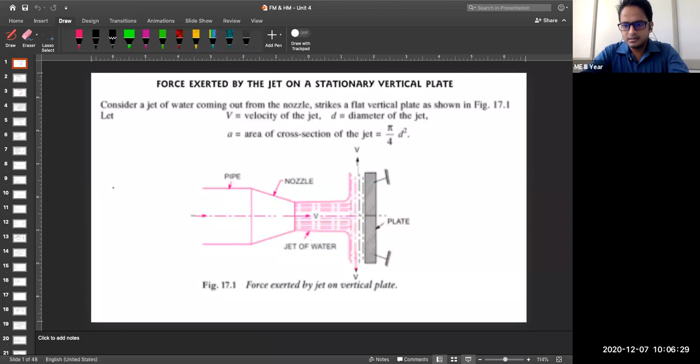On the screen you can see one figure is there. Let me make it large. On the screen you can see one pipeline is there. This is your pipeline. A nozzle is connected to this pipeline. Now I hope it is clear to all of you what is the meaning of nozzle.

Here you can see the cross-sectional area of your pipe is reducing. If the cross-sectional area of the pipe is reducing, the velocity will increase. Keep this in mind, again and again I am repeating it. So what is the velocity over here? It will be slightly higher than the velocity over this cross-section. This is the function of this nozzle, we want to increase the velocity of the fluid flow. So now you can see here the fluid is flowing.

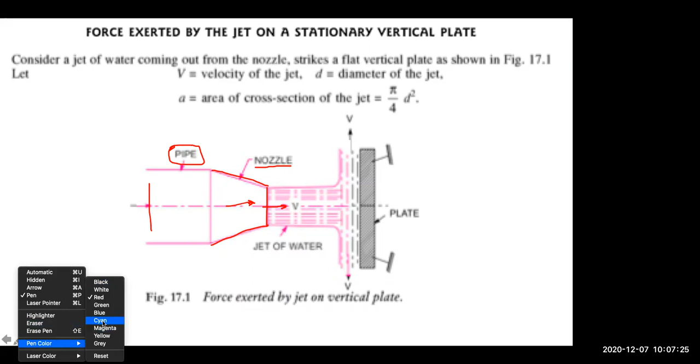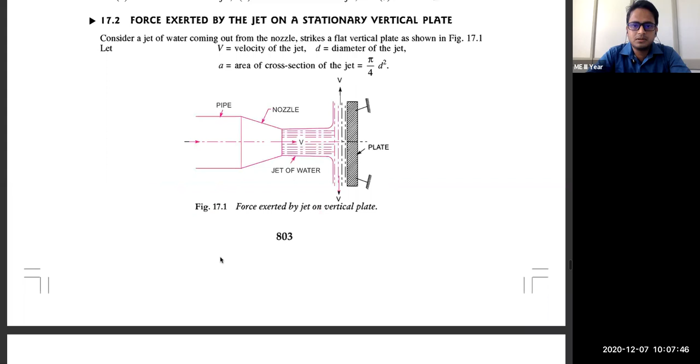Sir, the slide is not clear, sir. Slide is not clear. Okay, yeah, for me also it seems to be a little bit blurred. Don't worry, I will share then. Some other, where is that? Okay, now this is visible. I hope this is okay. Yes sir, visible, clear. Okay, okay.

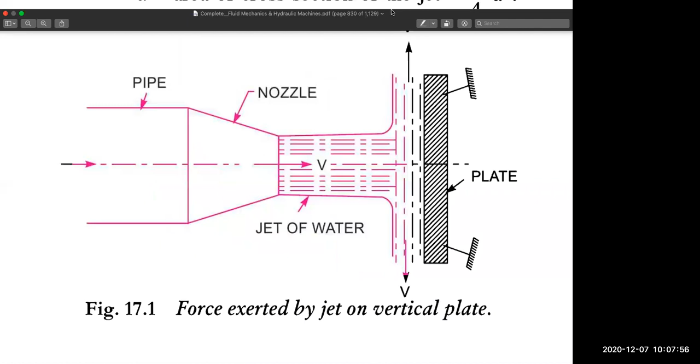Now let me bring in those annotations here. You can see here one pipeline is there, nozzle. So we are increasing the velocity of the fluid flow through this reduced cross section.

And you can see here on the right-hand side, one plate is connected. And this symbol, if you focus on it, represents that this plate is held stationary. This plate is fixed, it is not moving. This symbol you keep in mind. Why am I telling this? Because first we are studying the case where the plate will be in a stationary position. Next case we will study when this plate will also be moving.

Now what is happening here? The fluid is coming. Let me see whether I can change the color. Yeah, I can change the color also. Yeah, you can see here.

Blue color I am using. Okay, the fluid is flowing in this direction, and it is giving an impact on this vertical plate. Afterwards, the fluid is moving in perpendicular directions on both sides, upward and downward. You can see the fluid is moving.

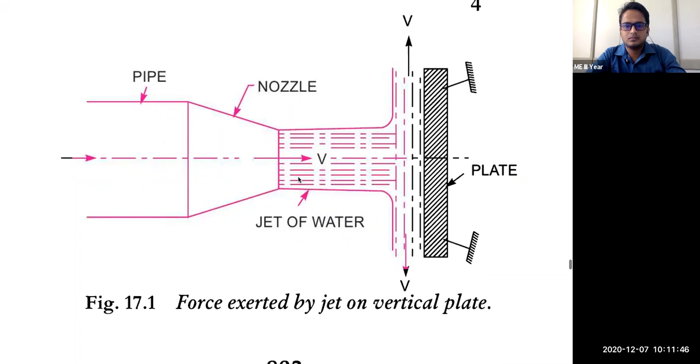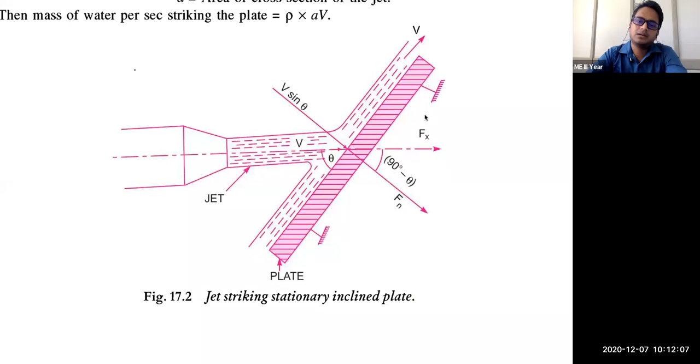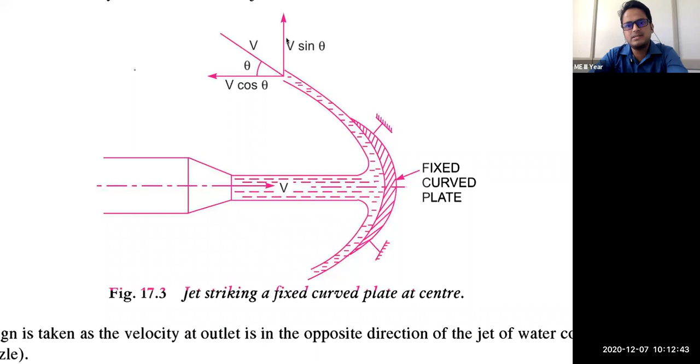After this, the third case that we will see is this one, where the plate is curved and fixed. The plate is fixed and curved in nature, now it is not straight. So what will happen when the fluid is hitting here at the center, and the fluid is exiting tangentially with this curved plate? Now you can see the exit velocity is making some angle theta, so we will break the components into sine theta and cos theta. We will see one by one.

So I have shown you all the three cases that we are going to study. Now we will see the mathematical part.

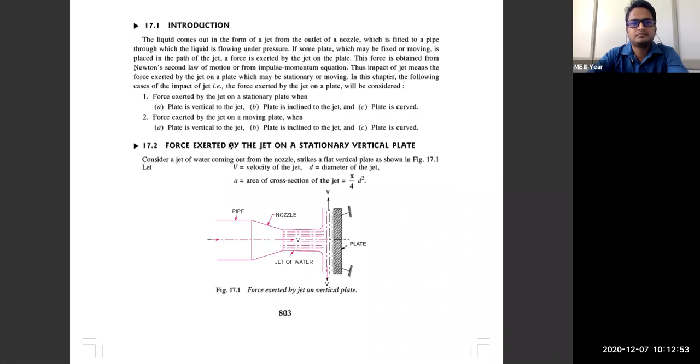As we have studied or discussed earlier also, we will be using Newton's second law of motion for its mathematical derivation. Now let's see what is the introduction written over here.

When the liquid comes out in the form of a jet from the outlet of a nozzle, which is fitted to the pipe through which the liquid is flowing under pressure, as I have told you, the liquid is flowing under pressure at this location. If some plate, which is fixed or moving, let me change the thickness of this, is placed in the path of the jet, the force exerted by the jet on the plate, we have to calculate.

And how will we calculate it? This force is obtained from Newton's second law of motion. Keep this in mind. Or, as we have discussed earlier also, the impulse momentum equation. Thus, the impact of jet means the force exerted by the jet on the plate, which may be stationary or moving.

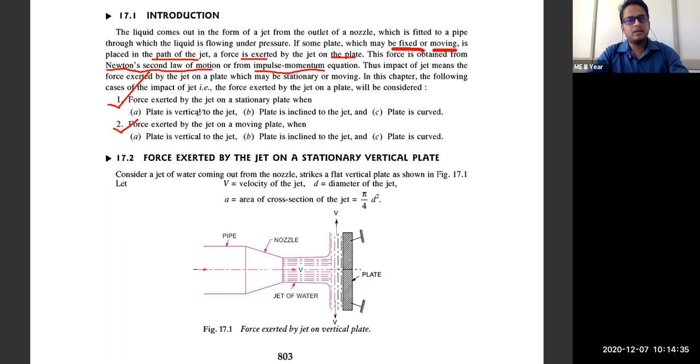So we will see two cases. The first case here is where the plate is stationary, the second case where the plate is moving. Plate is vertical, plate is inclined, plate is curved, for the second case the plate will be moving. Those three cases only, but this time it is not stationary, it will be moving.

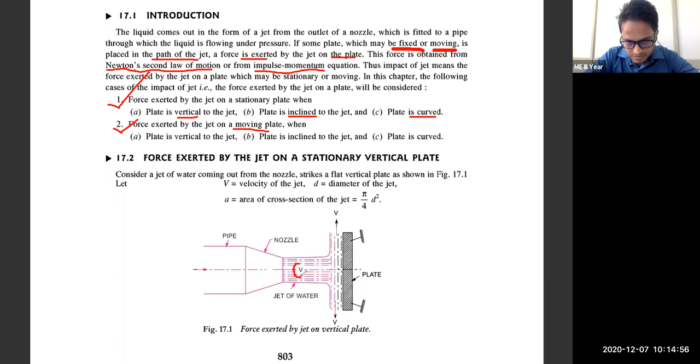Now let's see the derivation part. The velocity of jet is represented by capital V. The diameter of jet, it will be represented by this location. This is your diameter of the jet, represented by capital D, the small d, diameter of the jet. A will be the cross-sectional area of the jet. We all know the formula for the cross-sectional area will be pi by 4 into d square.

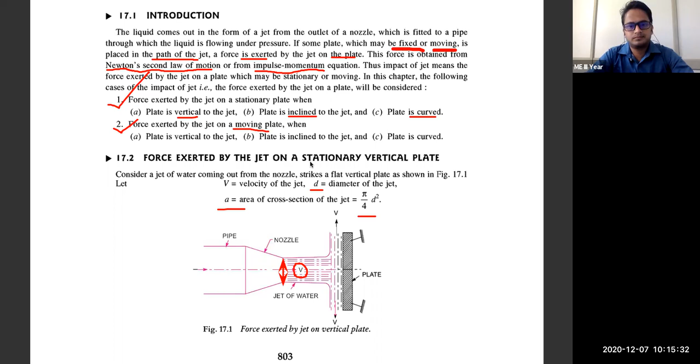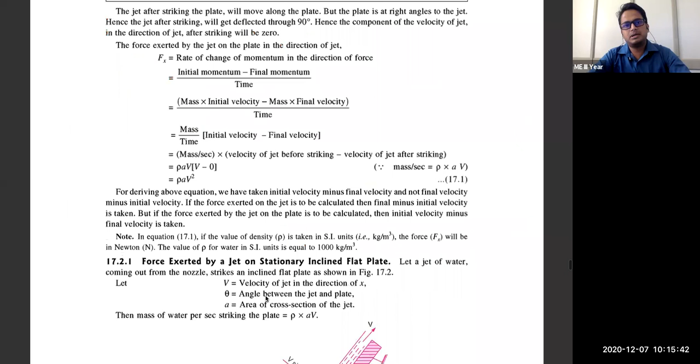Now, if you remember the impulse momentum equation that we have studied, when the jet strikes the plate, the jet after striking will move along the plate, but the plate is at right angle to the jet. Hence, the jet will be deflected to 90 degrees, as I have told you earlier.

Here I have told you two assumptions we are taking. First, there is no frictional loss, and second, there is no loss of energy due to the impact of the fluid on the plate.

Now as per Newton's second law, or the impulse momentum equation, we know that force exerted in the direction of the jet equals the rate of change of momentum in the direction of force. Rate of change of momentum means initial momentum minus final momentum. Momentum is nothing but the product of mass into velocity.

If I am telling initial momentum, mass flow rate will remain the same. What is changing? Velocity. So we can say mass into initial velocity minus mass into final velocity, upon time. Since mass flow rate remains the same, we can take mass upon time outside of the bracket. What will remain inside is the initial velocity minus final velocity.

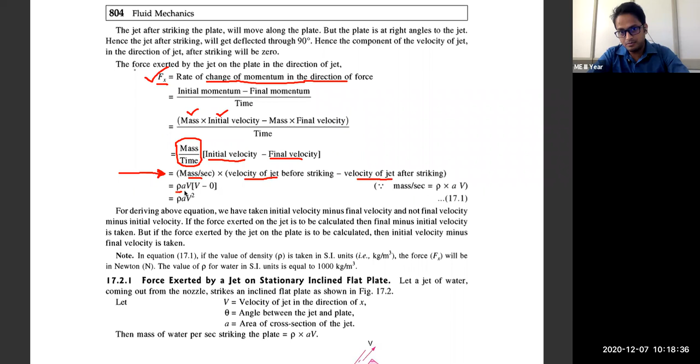What is the mathematical expression for mass flow rate? Keep this in your mind: rho into A into V, where rho is the density of the fluid, A is the cross-sectional area, and capital V is the velocity of the fluid.

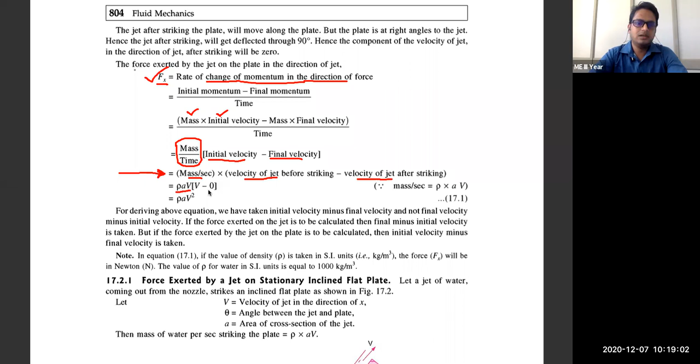We all know that the velocity of the jet before striking is given by capital V. Now for final velocity, here I am writing 0. Can anyone tell me why I have written 0 here? When the water strikes the blades, then the velocity becomes 0, sir.

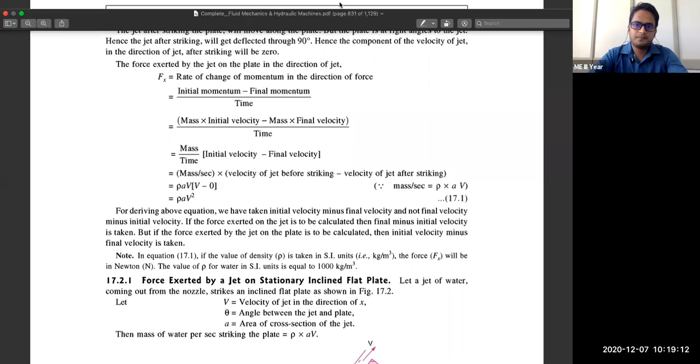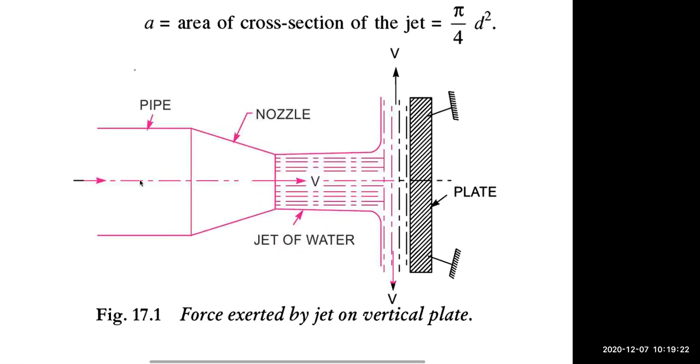Not a complete answer. The answer is correct, but it is not complete. See the figure, then you will get some idea. Here I am telling you that we are calculating the force in the direction of fluid flow. And what is the direction of fluid flow? Horizontal direction.

Here at this location, the velocity is V. Now final velocity, I told, is at the exit location here, and you can see the velocity is V here also. But the thing is, it is in the vertical direction. And we are calculating the force in the direction of fluid flow, which is this direction. So what is the component of velocity in the x direction? It is 0. We have only the y component of velocity here. That's why we have taken final velocity as 0.

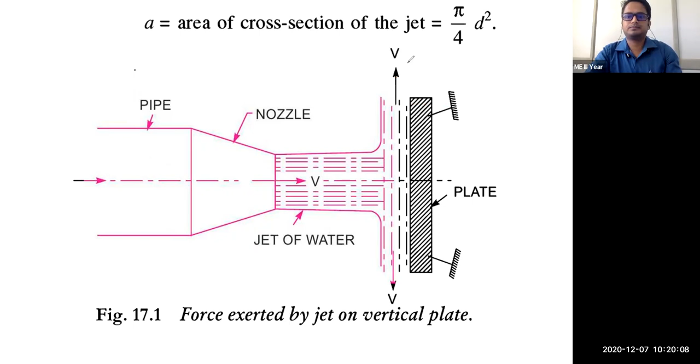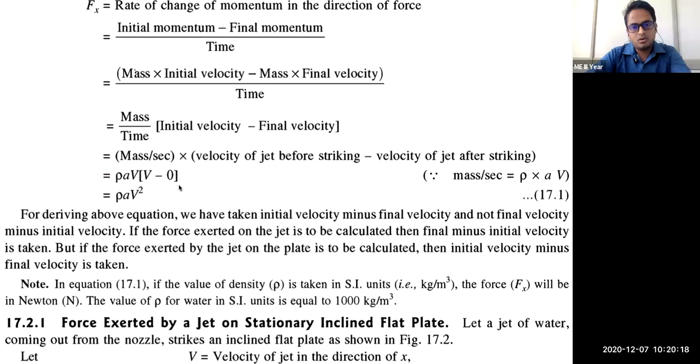I hope it is clear to all of you. Now, if you multiply this, it is a simple expression that you are getting: rho into A into V square. So this is the expression you have to use for solving the numericals.

When the plate is stationary and some fluid is hitting it with velocity v, the nozzle cross-sectional area is small a and the density of that fluid is given by rho. So this is the derivation part of the force exerted by the fluid on a flat vertical stationary plate.

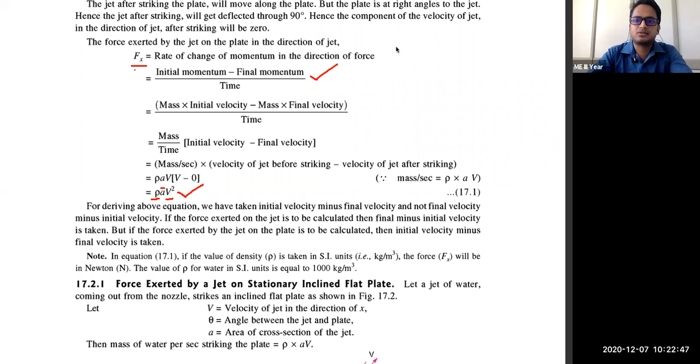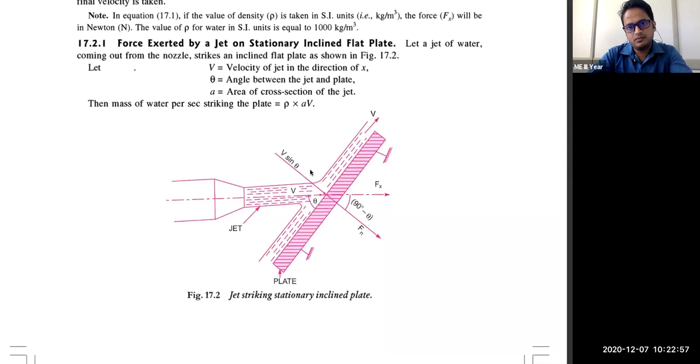Now what I have done here, we are going to study the force exerted by the jet on a stationary inclined flat plate. Here you can see the plate is making some angle theta with the direction of fluid flow. In this situation, what will we do?

So we are going to calculate here the force perpendicular to your plate, since the plate orientation is like this. How much force this fluid will exert on the plate in the normal direction, and then after that we can break it into components, that is your x component or y component, in whichever direction you are looking for.

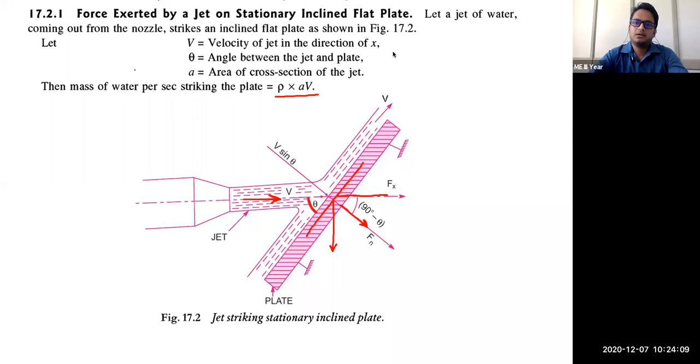Let's see. We all know that the mass flow rate of the water striking is rho into a into v. Velocity of the fluid is given by capital V. The angle between the jet and the plate is theta. Now we will see its mathematical part.

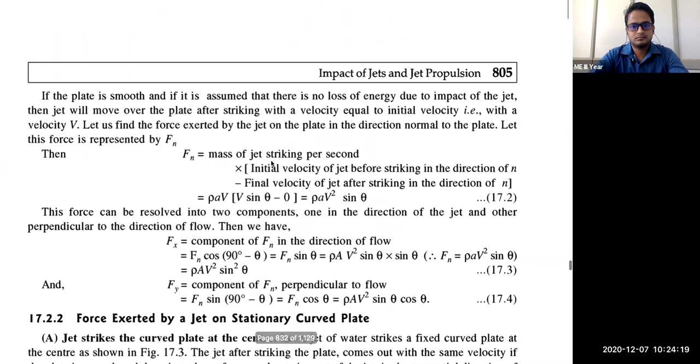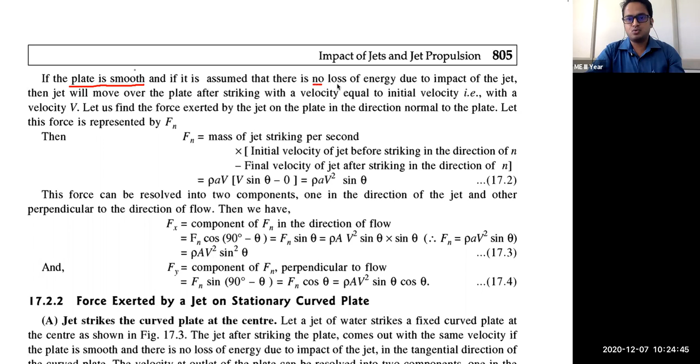Now see here, those two points are highlighted. What are those two points? The first point: the plate is smooth, meaning there is no friction at all. The second assumption is that there is no loss of energy due to the impact of the jet.

So the two assumptions: first, the plate is smooth; second, loss of energy due to impact of the jet is negligible, or no loss is occurring. Then the jet will move over the plate after striking with velocity equal to the initial velocity. Only if these two assumptions hold will the final velocity and initial velocity remain the same in magnitude. Only the direction changes, you have to keep that in mind.

So let's see how to find the force exerted by the jet on the plate in the direction normal to the plate, Fn. The formula remains the same. Here we use the Fn term because we are calculating the normal force, meaning perpendicular to the direction of the plate.

Now, mass of jet striking per second is nothing but the mass flow rate, given by rho into a into v. And we need the initial velocity before the jet strikes the plate, and the final velocity after the jet strikes the plate. So again I will show you that figure, and we will find out how to calculate the velocity before striking and the velocity after striking.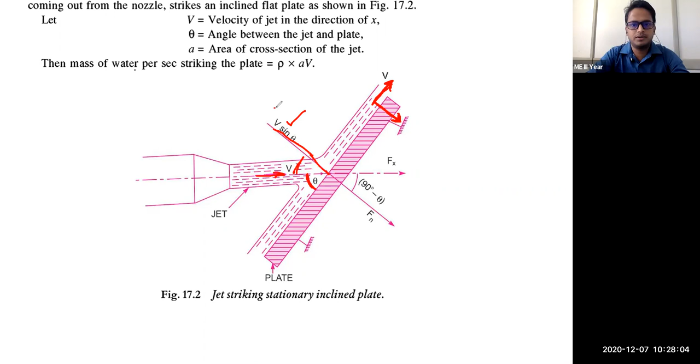And we are eager to calculate the force in normal direction, so in this direction there is no velocity component. That's why the final velocity term will be 0 and the initial velocity term will be your V sine theta. Rest all remains the same. Okay, so let's see here.

This is how they have written that Fn equals rho into A into V. This is your mass flow rate. Initial velocity V sine theta, how it comes I have shown you through the diagram. Final velocity 0. The thing you have to keep in mind is the direction.

We are calculating both in the direction of n. So if you simplify it, what you will get is rho A V square into sine theta. This is your expression for the force in normal direction.

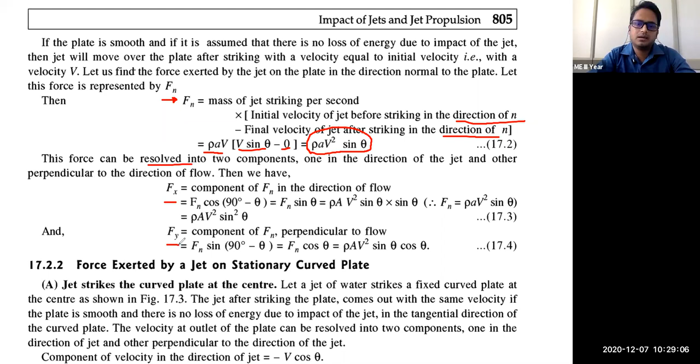Now you can break this component into vertical and horizontal direction, so it is resolved into two components: first is your Fx, second is your Fy. One direction is along the jet and another perpendicular to the direction of flow. Since it is at some angle, there will be two components.

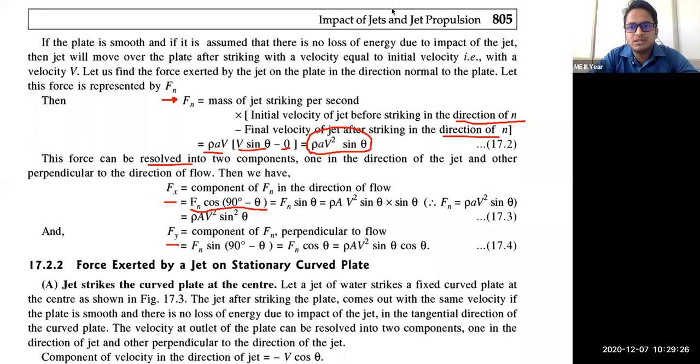Now see here how Fx equals Fn cos(90 minus theta). You have to see that diagram, I will take you to it. You have this Fn in this direction, and in this direction you have Fx.

So you have to see what angle it is making. 90 minus theta is this one, so your Fx will be Fn cos(90 minus theta). Similarly, if you want to calculate this one, it will be Fn sin(90 minus theta). So this is how that component has been broken.

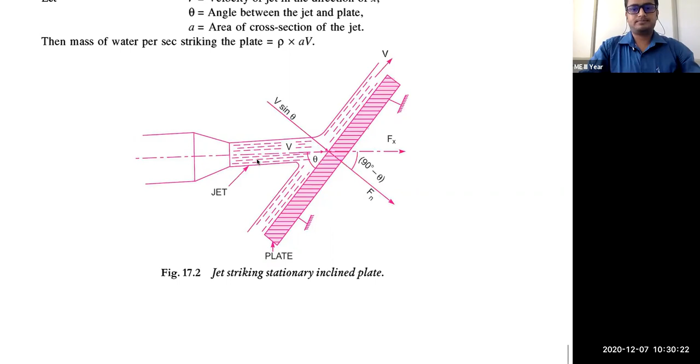That is good, so this is how we calculate the components: Fn cos(90 minus theta). Later, for cos(90 minus theta) you can write sin theta, and for sin(90 minus theta) you can write cos theta. So what expression will you get?

Fn that you have obtained over here is rho A V square sin theta; into this sin theta will come, so it becomes rho A V square sin square theta. This is the force component in x direction. Similarly, you can calculate the force component in y direction. Sin(90 minus theta) becomes cos theta, and the final expression you get is rho A V square sin theta into cos theta.

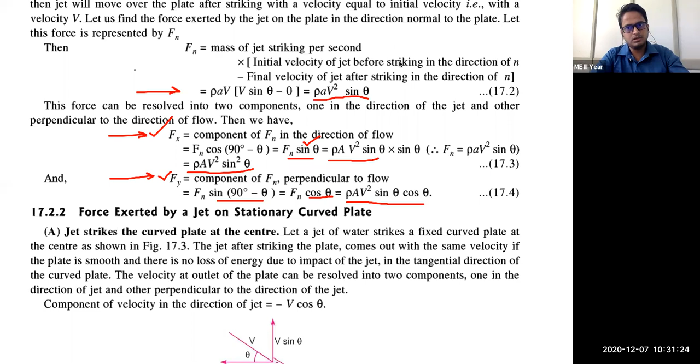So these are the expressions we have obtained for Fn, Fx, and Fy. Now the third case I told you about, when the plate is in a curved position, when the plate is curved in nature.

Here you can see the plate is fixed. How do you show the plate is fixed? This diagram, this notation you have to use. I am highlighting and circling this because in examination many students forget to draw it. So do not forget this. If you have to represent that the plate is stationary, you have to draw this symbol. If you don't draw this, the examiner will think the plate is moving with some velocity.

Let the water jet strike the fixed curved plate at the center. Here we are hitting this curved plate at its center, and you can see it is symmetrical in nature about this center line, symmetrical on both sides.

Those two assumptions will stay here also. What are those two assumptions? The plate is smooth, and there is no loss of energy due to impact of the jet. Always keep these two assumptions in mind.

When the jet is hitting and there is no friction, then it will move in the tangential direction to your plate. And what is that tangential direction? This is your tangential direction. Since there is no loss of energy, the velocity will remain the same in the tangential direction, given by V. And it is making some angle theta with your horizontal direction.

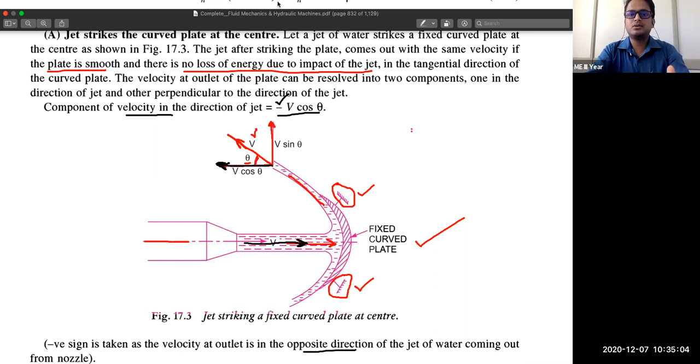Now we will see the mathematical part. For your clarity, I would like to tell here once again how we are calculating that mathematical expression. The same formula you have to use here also: mass flow rate into initial velocity minus final velocity. Only thing that you have to take care is the direction of the fluid flow. Okay, so let's see.

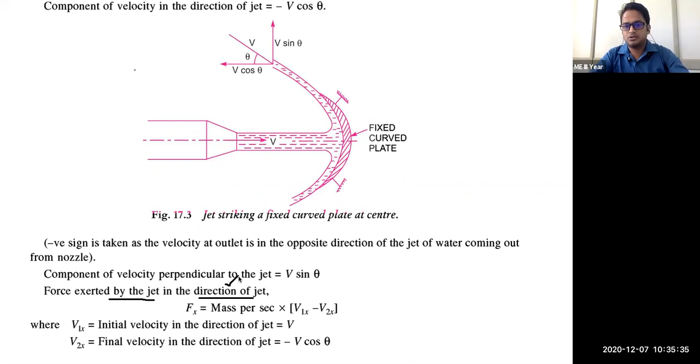First, we will calculate in your X direction. Force exerted by the jet in the direction of the jet. In the numerical, it will not be written as X direction or Y direction - they will write in the direction of jet, perpendicular to the direction of jet. So if it is written in the direction of jet, you have to take care. For this particular case, it will be Fx.

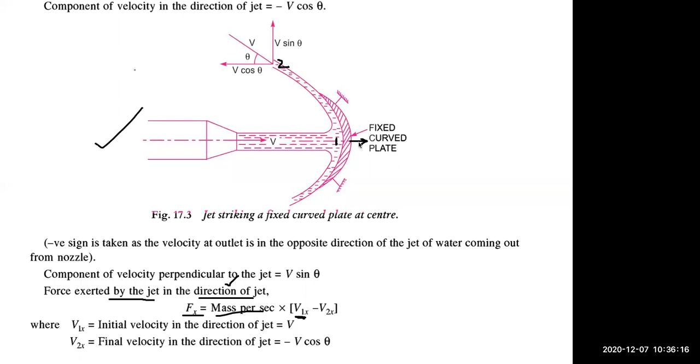Mass per second, it is mass flow rate into V1x. What is V1x here? At this location, I am taking it as 1. At this location, I am taking it as 2. Location number 1, before striking the plate. Location number 2, after striking the plate. Suffix x is coming because we are taking the X direction here for this case. So V1x means velocity at point 1 in the direction of X, and V2x means velocity at point 2 in the direction of X.

So we know that at point 1 it is V, at point 2 it is minus V cos theta. So you can substitute this value. You know the expression for mass flow rate - it will be rho into A into V into V1x minus V2x. Let's see afterwards what is happening.

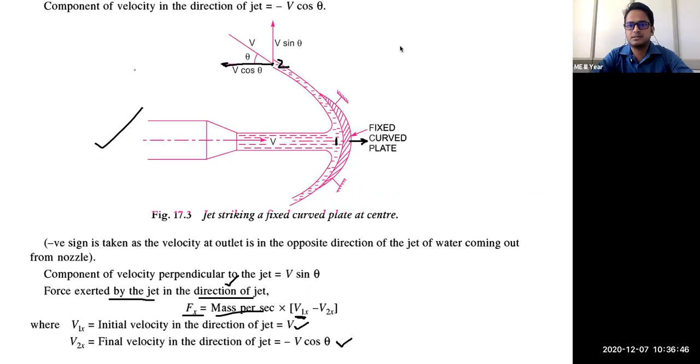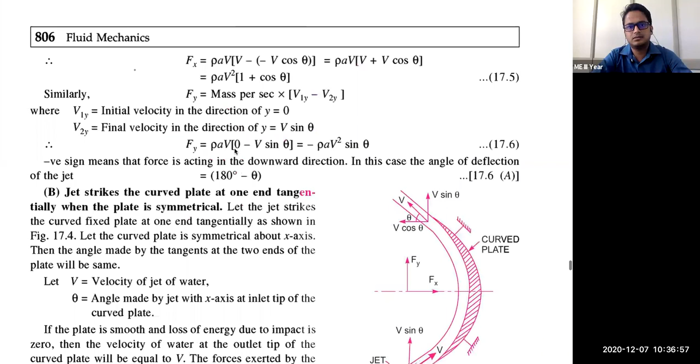So here you can see rho A V, V minus of minus V cos theta. So minus and minus, it will become plus. So what you are getting here is rho A V square into 1 plus cos theta. So what is the final expression? This is your final expression for force in X direction. It is nothing but rho A V square into 1 plus cos theta. So you have to keep this in your mind: rho A V square, 1 plus cos theta.

Similarly, in Y direction, now we will calculate Fy. The formula will remain the same: mass flow rate into V1y minus V2y. Now try to think, try to assimilate what is this V1y. V1 means velocity at point 1 in Y direction. This term - velocity at point 2 in Y direction.

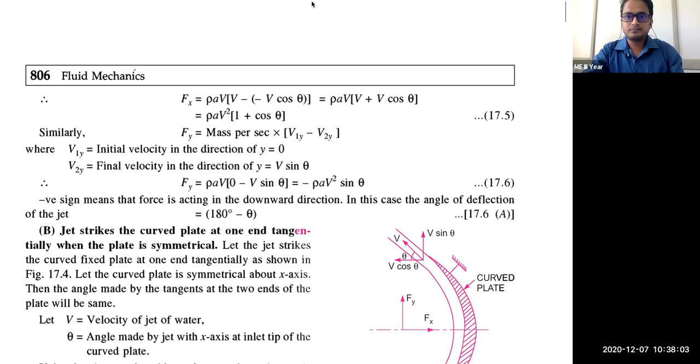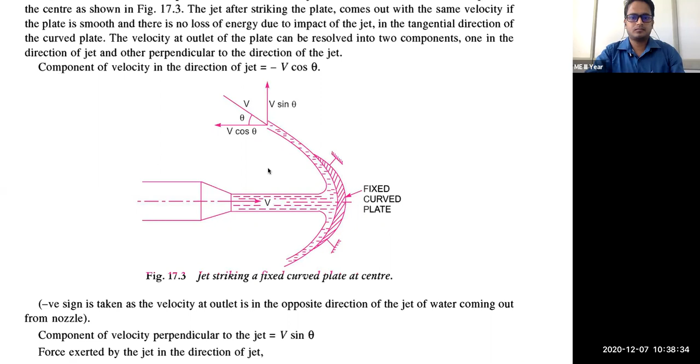Okay, so once again I will take you to that diagram. Now this diagram, if you will see, what is the component of velocity in X direction, Y direction here? In Y direction, the velocity component here is 0. And at location number 2, the velocity Y component is V sine theta. So this you have to use in your numerical expression. So initial velocity we are taking 0, final velocity we are taking V sine theta.

Why here we have not taken a minus sign? Because this V sine theta is in the vertically upward direction. So what expression will you get here? You will get minus rho A V square sine theta. Here the negative sign represents that the force is acting in the downward direction.

And the angle of deflection of the jet - this you have to keep in mind, because in numericals we will be using this term, the angle of deflection of the jet. In numerical problems, this data will be given. So this is 180 minus theta degree. How is it coming like that? Suppose this is that same figure you can see here - if you are extending this on the back side, I am extending this.

It is intersecting at this location to the horizontal axis. You can see here on the downward side, this angle is your theta. So what will be this angle? This will be your 180 degrees minus theta. So this angle is normally called the angle of deflection, because the fluid is coming in this direction and getting deflected in this direction.

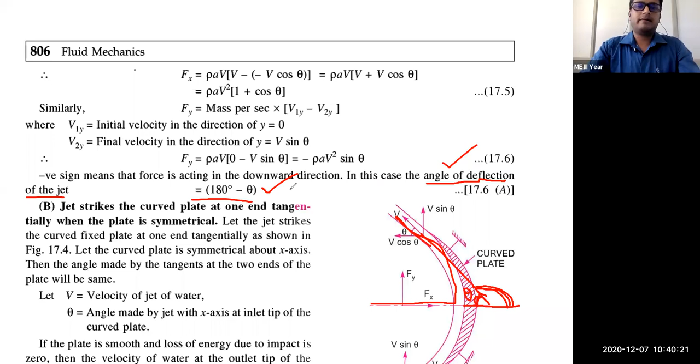So we have seen 3 cases. The first one is when the plate is stationary vertical. Second case, when the plate is stationary but inclined at some angle. And the third case, when the plate is curved and stationary. These 3 cases we have seen, and its mathematical derivation we have seen. Now one numerical from all 3 cases we will solve.

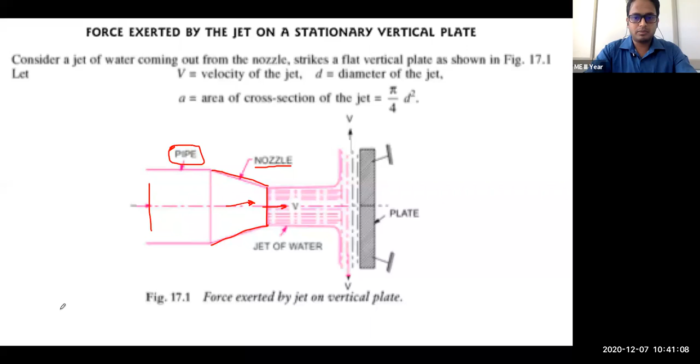I'll go back to my PowerPoint slide and we will solve numerical. I'm expecting all of you to be ready with your calculator now. Now we will solve numerical and do fast calculation, because we have only 10 minutes, and in 10 minutes we have to solve 3 numericals.

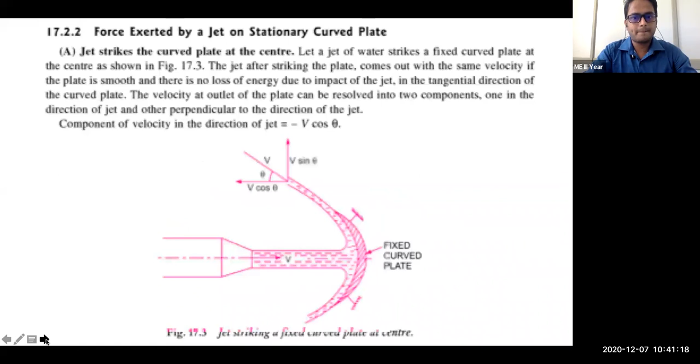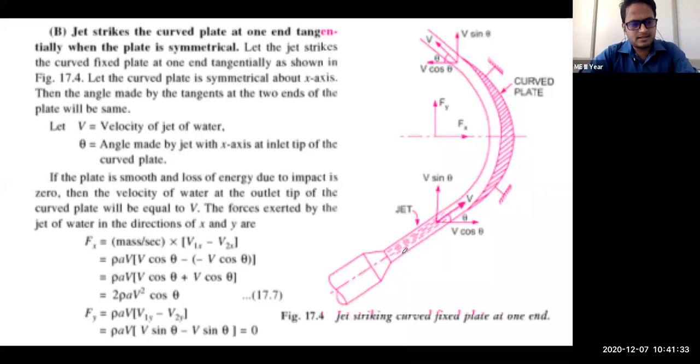One more case is there when the jet is striking the curved plate tangentially. So let's finish this, and numerical we will solve in next class, tomorrow's class. For clear visibility, again I will go to that PDF version.

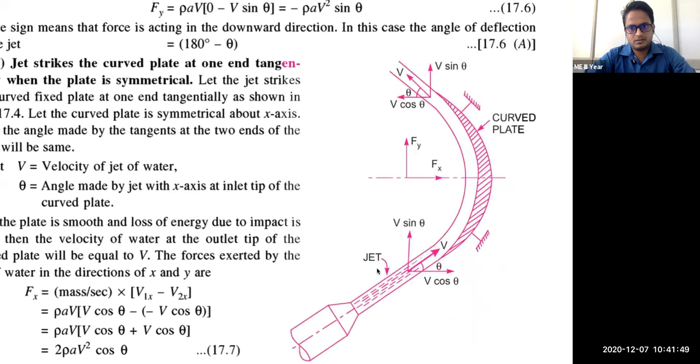This is the 4th case. I'll try to bring this at the center because we know what steps to follow for its derivation, so I'll focus on this diagram only. If you learn how to draw these velocity diagrams - this is basically called a velocity diagram, keep this in mind - if you know how to draw the different velocity and force components, then you can solve any numerical.

So you can see here the fluid is now coming in this direction. It is entering inside this curved plate tangential to it. Now if it is entering tangentially, this is your velocity V, so its horizontal component will be V cos theta and vertical component will be V sin theta, since it is making an angle theta with the horizontal.

So here, what will be your V1x? Yes, anyone in the class? V1x that we are using in that previous formula - V cos theta, yes, velocity at point 1 in x direction. Now velocity at point 1 in y direction, V1y - sin theta, V sin theta.

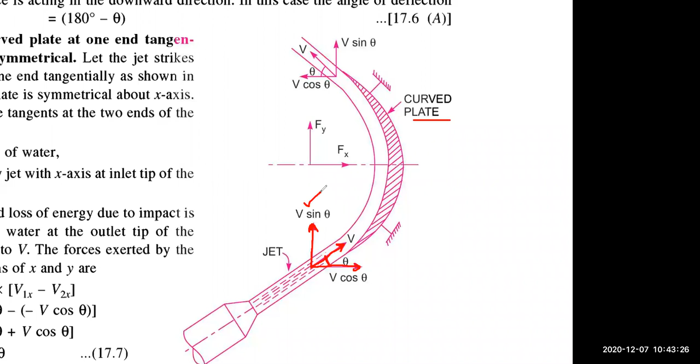Yes, now come to your exit location, point number 2. This is your point number 2. V2x - what will be V2x? Yes, minus V cos theta, because it is going in opposite direction. Similarly, what will be V2y? It will be V sin theta. So direction here you keep in your mind.

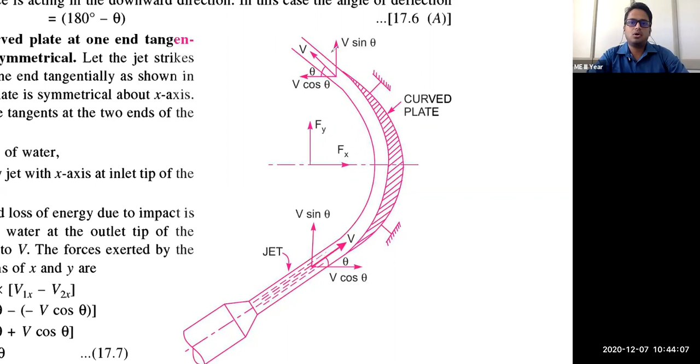Now if you understand this velocity diagram, how to draw this, then you can easily do all the calculations. Velocity drawing is important - if you have drawn that velocity diagram perfectly, then it will be perfect calculation. This chapter is a scoring chapter, again and again I am telling you.

So those two assumptions will stay here also. What are those two assumptions? One, again, plate is smooth and loss of energy due to impact is 0. Keep these 2 points in mind - for every derivation we are doing now, these two assumptions are common to all derivations. Plate is smooth means frictionless, and loss of energy due to impact is 0.

For this case, if we are considering these two assumptions, then what will happen? The velocity at inlet, represented here by V, will remain the same at inlet as well as outlet. If there were certain losses, some friction, then this V would change. So we assume the plate is smooth and there is no loss of energy, so the inlet velocity as well as outlet velocity will remain equal to capital V.

Now, again coming to your x direction, we will calculate force in x direction, Fx, and force in y direction represented by Fy. So Fx will be mass flow rate into V1x minus V2x. And mass flow rate is given by rho into A into V.

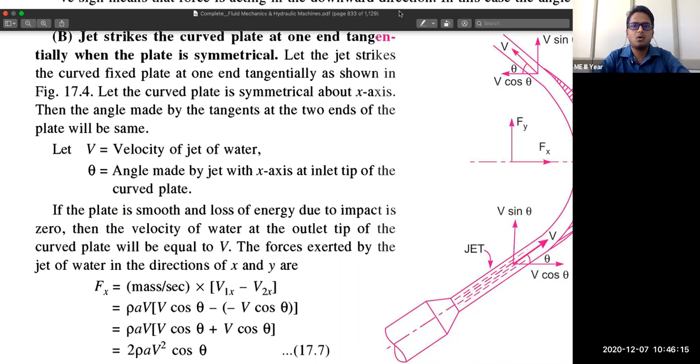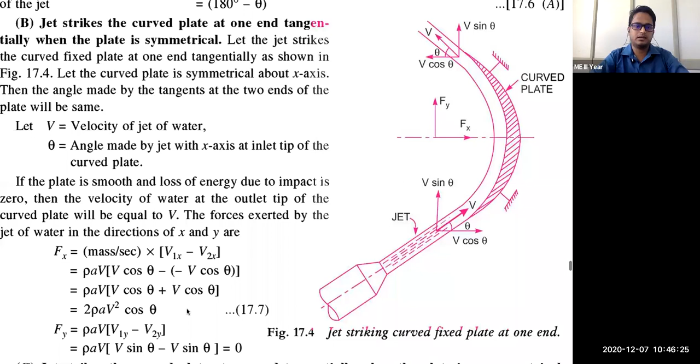Now, similarly, you can calculate in the y direction also. Again the formula will remain the same: rho into A into V into V1y minus V2y. What is V1y? V sin theta. What is V2y? It is V sin theta again. Directions are same, so you can write V sin theta minus V sin theta, so it will become 0.

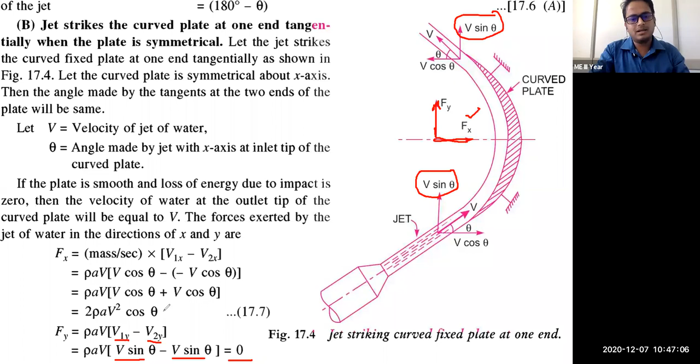So force in y direction, Fy, will be equal to 0. Only what you get is force in x direction, represented by Fx, and its magnitude will be 2 rho A V squared cos theta.

So this is the fourth case we have seen: flat plate is stationary, inclined plate is stationary, curved plate hitting the jet at the center line, curved plate where the jet is entering tangentially to the plate.